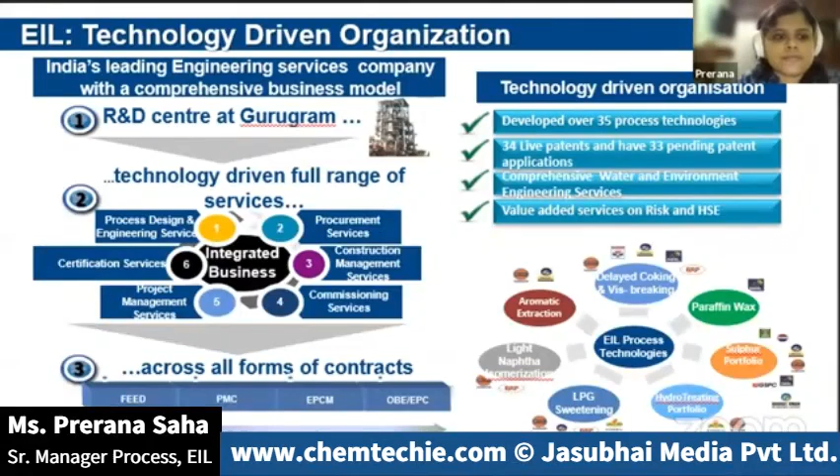Now, very much relevant to today's topic of reducing carbon footprint in refineries, we would like to mention that EIL's technology development efforts are aimed at serving the hydrocarbon industry with environment-friendly and sustainable technologies, some of which are outlined in this slide. Beginning with the first one, the ammonia recovery from sour gases. It recovers ammonia from sour water stripper gases, and by removing the H2S, the stream is recycled back to SRU.

Then there is CO2 capture from flue gases. It uses an amine-based solvent, and this chemically reacts with the dissolved CO2 present in the flue gases. We have the tail gas treating unit in our sulfur recovery unit, which ensures that the H2S present in the hydrogenated gas gets recovered, and ultimately a recovery of sulfur of 99.9% is achieved.

Then we have the hot well off gas treatment, which removes the sulfur from the hot well off gases produced from the vacuum column. We also do low level heat recovery from streams like product rundowns, exhaust gases from various processes, which otherwise would get wasted. And we use this low level heat recovery for power generation.

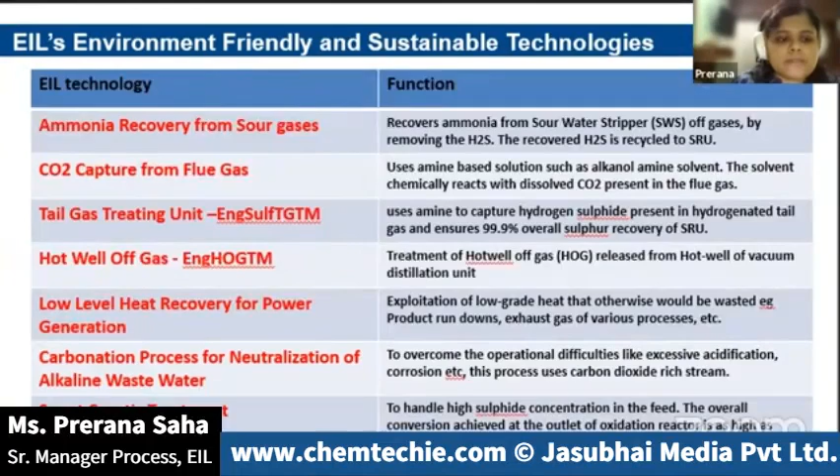Now, coming to the current global CO2 emissions from oil refineries today. The carbon in any fuel source ultimately ends up in the atmosphere in the form of carbon dioxide. Carbon dioxide, as we all know, is the major pollutant, and it is recognized as the prime GHG, that is greenhouse gas. Our Earth has been dealing with increasing global temperatures that are poised to create havoc if the present rate of temperature rise continues unabated.

Therefore, as per COP21, the Conference of Parties Paris Agreement, a concerted effort is being adopted to reduce this global temperature rise to, say, 2 degrees Celsius from pre-industrial levels. More specifically, targeting all efforts to limit the global temperature rise within 1.5 degrees Celsius.

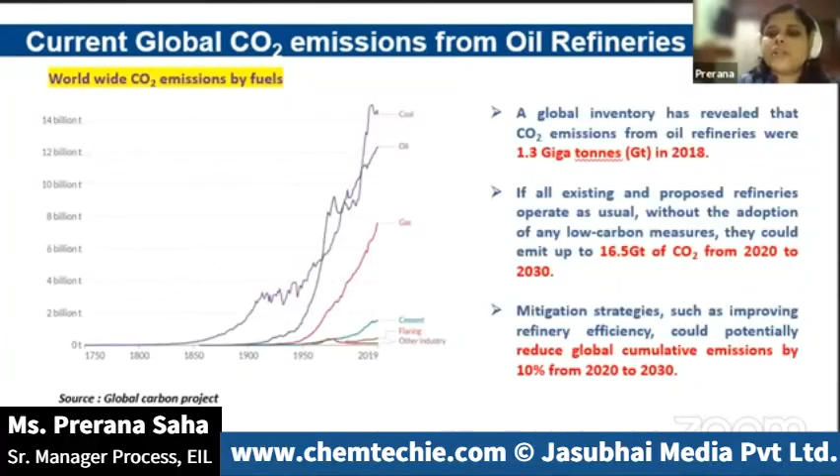With our focus on oil refineries, a global inventory has revealed that in 2018, the CO2 emissions from oil refineries worldwide were 1.3 gigatons. If all the existing refineries and the proposed new refineries operate as usual without adopting any mitigation measures, then ultimately this figure would land up to 16.5 gigatons from 2020 to 2030. Thus, it becomes very important that mitigation measures are in place so that we achieve at least some reduction in these CO2 emissions.

Now, what are the sources of CO2 in a refinery? Coming to the major sources, number one is the stationary combustion source, which is the process fired heater. It is there in almost all the process units of a refinery, from CDU, DCU, NHT, etc. And then we also have the boilers in our CPP.

In any process fired heater, we basically fire fuel oil or fuel gas in order to produce thermal energy, which heats the process fluid. Fuel oil or fuel gas is basically hydrocarbon. It contains carbon. Therefore, on burning, this will ultimately emit CO2. Therefore, CO2 is emitted from the fired heaters and the boilers.

Another major source is the FCC catalyst regenerator. This generates CO2 through the combustion of coke that is deposited on the catalyst particle during the cracking process. And lastly, we have the hydrogen generation unit, which is part of almost all refineries.

The most common method in the already installed hydrogen generation units today is the SMR process, which is steam methane reforming. In SMR, methane and steam react together to produce carbon monoxide. And the carbon monoxide produced in the initial reaction reacts further with the steam to produce more CO2. So the conventional hydrogen generation units, the FCC catalyst regenerators, and the fired heaters and CPP are the major sources of CO2.

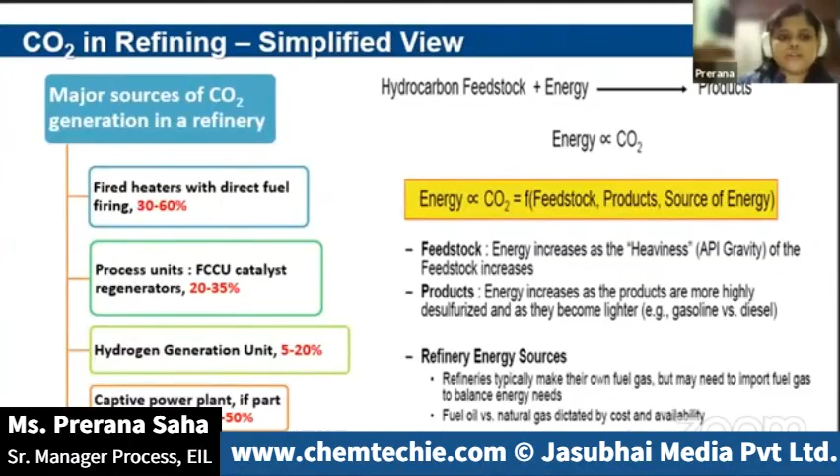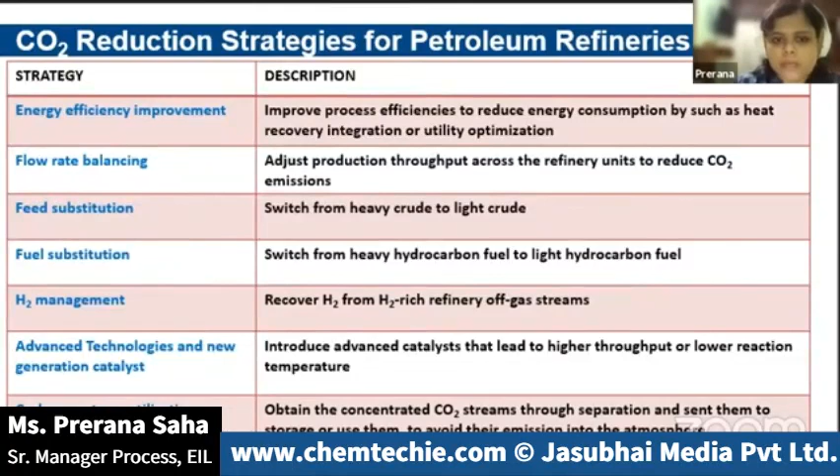Coming to the reduction strategies. Now, this slide represents the list of major reduction strategies. As we can see, we have energy efficiency improvement at the top. Then we have flow rate balancing, feed substitution, fuel substitution, hydrogen management, advanced technologies, using new generation catalysts, and lastly, the CCUS, carbon capture, utilization, and sequestration. Now, each one of these will be presented in the coming slides.

To start with, the easiest option to adopt for any refinery is fuel substitution. As already mentioned earlier, the emission of CO2 from a fuel obviously depends upon its carbon content. Commonly used fuels in the refinery are fuel oil and fuel gas, which are basically byproducts of our refinery. The other option is using natural gas, which is generally procured by a refiner.

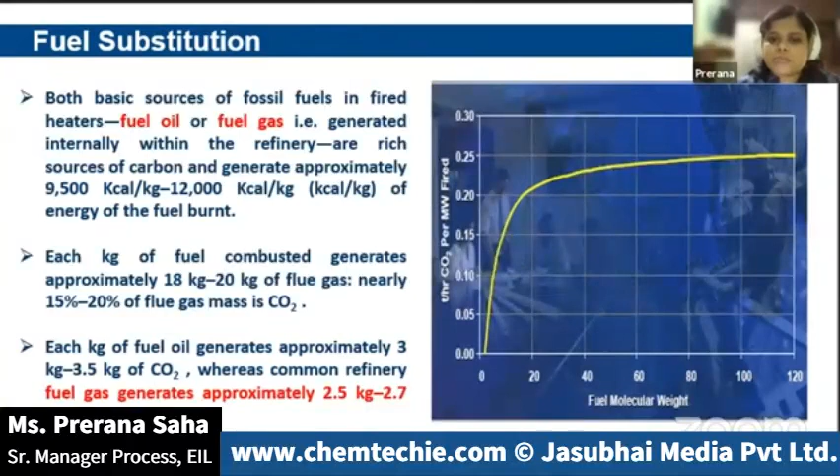Now, going by the empirical values, if we burn 1 ton of fuel oil in a fired heater, it produces approximately 3.5 tons of CO2. On the other hand, if we fire 1 ton of natural gas, it will produce a relatively lower value, 2.7 tons of CO2. Why? Because fuel oil has a lower hydrogen to carbon ratio and a higher molecular weight. Basically, it has more carbon, so it produces more CO2. So switching the fuel system from liquid fuel oil to natural gas can be adopted by a refiner to reduce emissions.

Next is flow rate balancing. Flow rate balancing is optimizing the operating capacities of the existing process units in a configuration scheme which would lead to low CO2 emissions. As the days go by, there will be increasing restrictions on CO2 emission. So with this increase, the refinery operating configuration needs to be adjusted accordingly. The preference will obviously shift towards less energy intensive units.

Using tools like linear programming, one can find the optimized operating capacity of the process units of a refinery that produce the least CO2 emissions on one hand, and on the other hand, ensure that maximum profitability can be realized by the owner. Therefore, changing the refinery operating configuration can create opportunities for less carbon emissions.

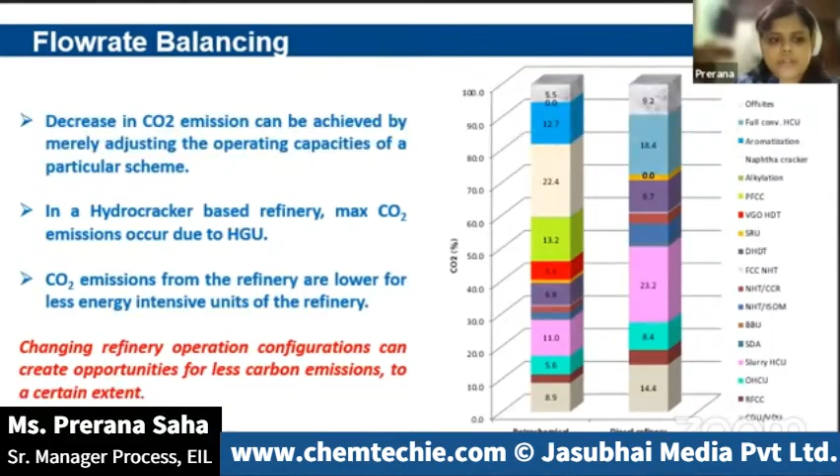Next, we will discuss hydrogen management. As already mentioned, hydrogen produced by the conventional method ultimately means releasing more CO2 as a byproduct. Going by the empirical values, every ton of hydrogen produced by the SMR process means releasing approximately 9.5 tons of CO2 into the atmosphere. Thus, whenever we hydrotreat streams like naphtha, diesel, VGO, we actually increase the total CO2 emissions from the refinery. The impact of this increase in hydrogen cost encourages a refiner to re-optimize their hydrogen balance.

Hydrogen management will effectively hunt down the hydrogen which is always present in our fuel gases, and recover it for use in the refinery as a process stream. This can be done by using PSAs, membranes, etc. Therefore, hydrogen recovery from fuel gas can be done to avoid that extra ton of hydrogen which you would otherwise produce in your conventional hydrogen units.

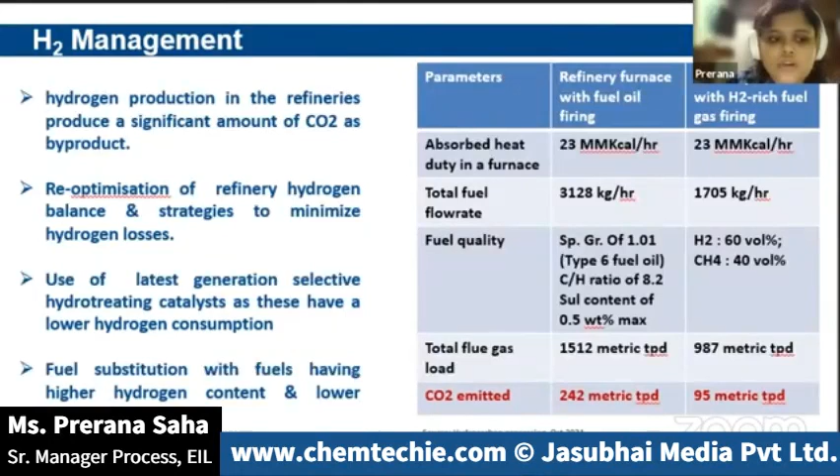Another option is feed substitution. All emissions in the refinery actually originate from the crude. The carbon that is found in the products like gasoline, diesel, jet, will get released along with the products, and the remaining carbon will ultimately land up in the environment in the form of CO2.

Making gasoline, diesel, and jet fuel products from very dense, high sulfur, modern Middle Eastern crudes requires putting more of the crude barrel through aggressive carbon rejection and hydrogen addition processing. This takes more energy. Burning more fuel means ultimately consuming more energy and releasing more refinery emissions. Therefore, crude substitution, that is substituting the crude with a low sulfur light crude, is an option available to a refiner for an existing refinery.

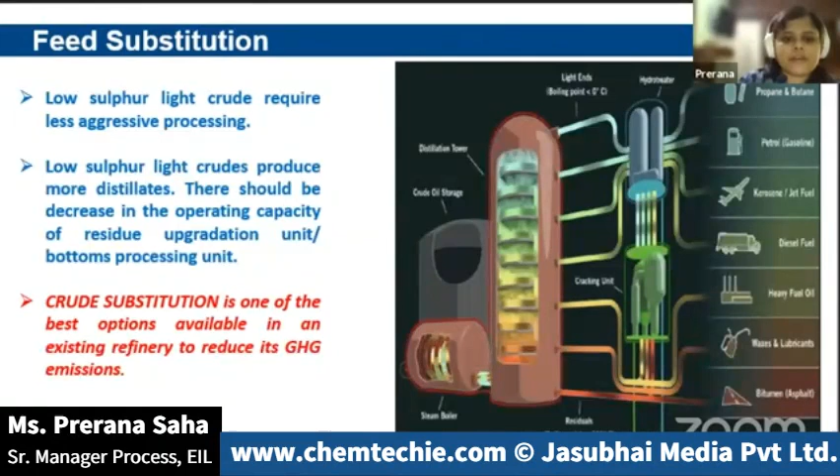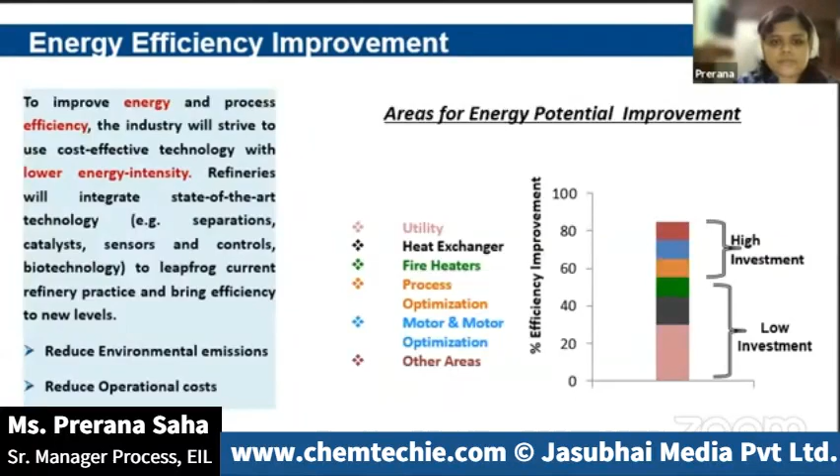Now, energy efficiency improvement. By efficiency improvement, a refiner can actually prevent emissions from occurring in the first place, or reduce the level of emission if it is totally unavoidable. This slide lists some of the energy efficiency measures.

Number one is improved operation and control. For example, routing of direct hot rundown of a stream, if feasible, from the source unit to the downstream unit without unnecessarily cooling it, can enable us to use the surplus heat in the downstream unit. Next is improved heat recovery.

Say, for example, often on investigation of a scheme, we see that there is a significant amount of heat in the reactor effluent, and it sometimes gets wasted, gets rejected to cooling water. So we could maybe recover this heat by adding new exchangers. Then employing advanced catalysts and advanced technologies for hydrotreating units can save some of the hydrogen consumption in these units.

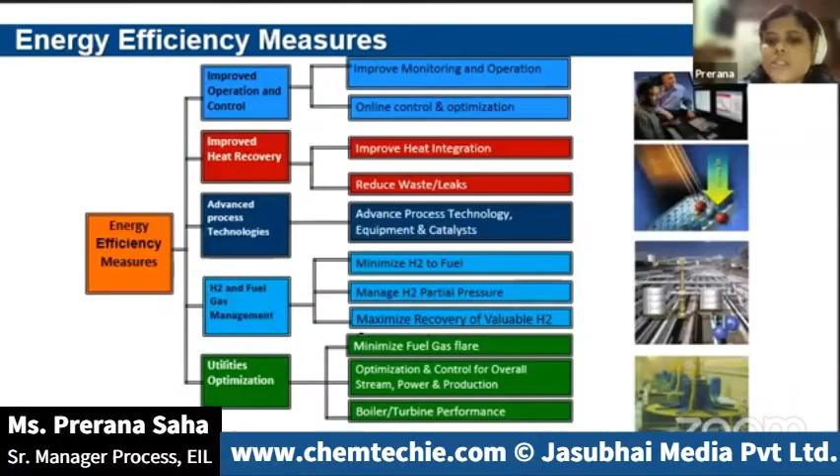And also careful operation and monitoring can be practiced in refineries to reduce the losses through flaring. Now, EIL's experience in the area of large-scale energy efficiency improvement studies could be leveraged to offer services in this area to prospective clients.

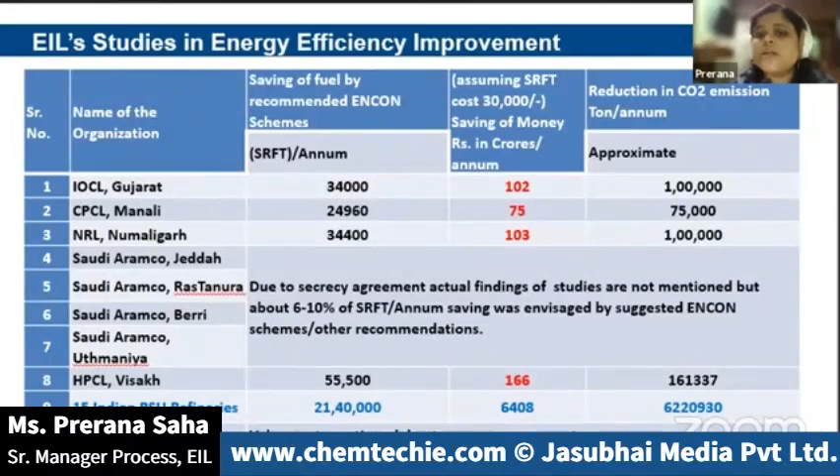EIL also has the proud privilege to design most of the CDU-VDUs for our Indian refineries. Now, distillation, we know, is an energy intensive operation, and therefore it provides opportunities for incremental innovations towards lowering the energy consumption in this unit and thereby reducing emissions.

EIL has already gained success over the years by making a lot of improvements on the design of our crude and vacuum distillation units, along with equipment upgradation, which has significantly brought down the OPEX of these units and achieved overall energy savings of up to 25%.

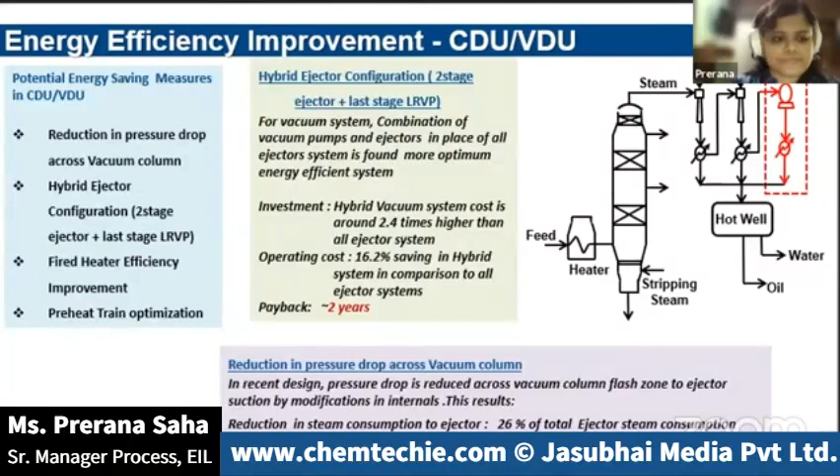Now, some of the measures are listed in this slide, like reducing the pressure drop across the vacuum column, installing a hybrid ejector configuration, improving the efficiency of fired heaters, preheat train optimization, etc. Lastly, CCUS, carbon capture, utilization, and sequestration. Now, this is an end of the pipe CCUS.

Now, it is well accepted that CCUS can provide a significant reduction in carbon emissions, but I would say that multiple factors stand as roadblocks to easy implementation of CCUS on common refinery furnaces. For example, a standard refinery has about 30 to 35 furnaces scattered across the entire plot plan of the refinery. And therefore, in our refineries, there is usually no single point source of emission where we can actually plan the CCUS to be implemented. So these all need to be explored before implementation of CCUS.

And also, I would like to mention that some CCUS technologies, like oxy-fuel combustion, actually advocate burning fuel in pure oxygen. And pure oxygen can be obtained by using an air separation unit, which is a very energy intensive unit. So before adopting such technologies, a thorough review of the total carbon footprint needs to be done for a particular refinery.

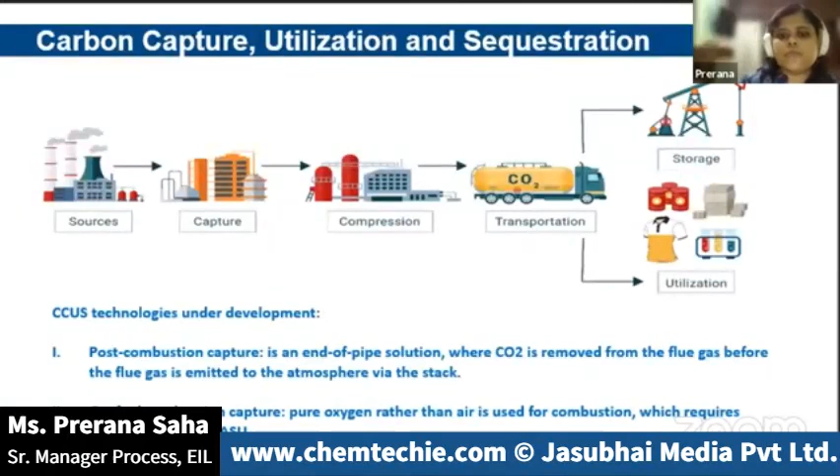Now, closing thoughts. After this presentation, it would be prudent to say that CO2 management in the refinery business is going to be a very important issue, given that petroleum refineries are one of the major CO2 emitters in the industrial sector. So for the reduction of CO2 emissions in refineries, various strategies have been proposed here.

But identifying the proper strategy for a particular refinery is very important, because each refinery is different from the other in terms of its geographical location, its configuration, its crude basket, its product profile, and also its fuel recipe. One solution that fits one refinery may not be suitable for another. So concerted effort is imperative for reducing these emissions for each refinery.

So we would like to conclude by saying that CO2 emissions need to be monitored, know your options for carbon emission reduction, the best fit solution for your refinery, and immediate and long-term planning needs to start now. We have to be prepared before the law comes.